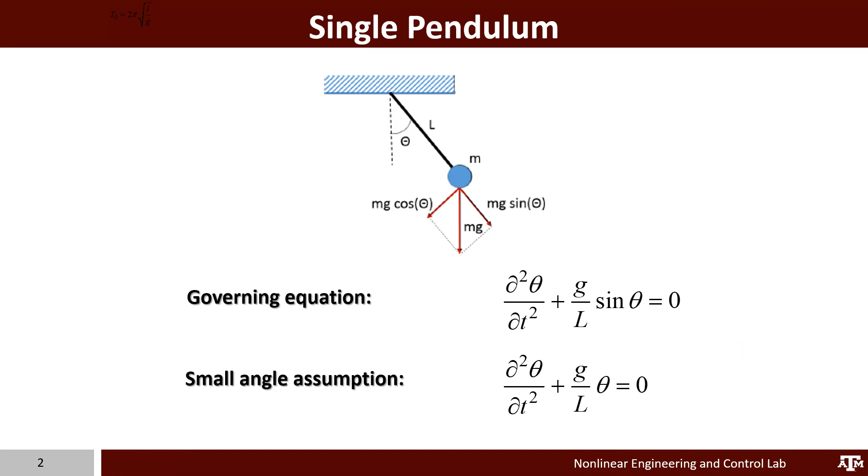Considering the nonlinear governing equation as well as the linearized equation, we plot their corresponding responses for small angle 5 degrees and 2 degrees, overlapping these two responses on top of each other. We see that initially the errors are very small. However, as the system progresses in time, the error grows rapidly with rather significant increasing phase lag.

Such a difference in phase and phase lag indicates that the linearized and nonlinear versions have fundamental differences at the frequency level.

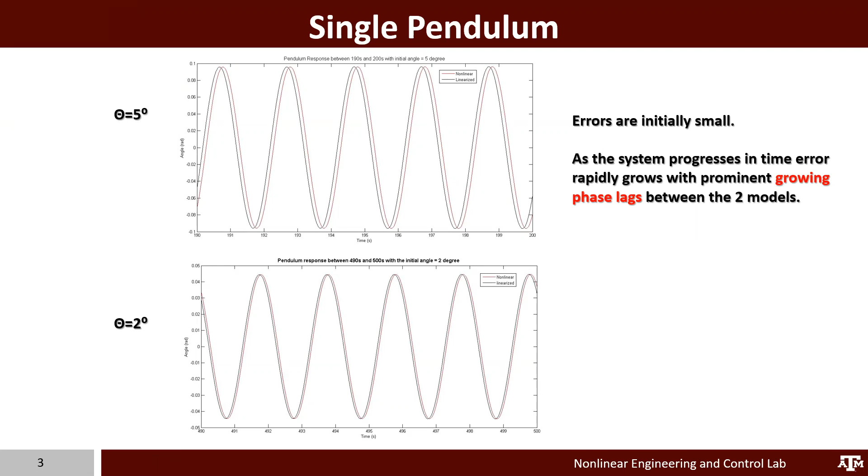Indeed, the linearized pendulum has a fundamental period which is not a function of the angle theta. However, the nonlinear pendulum is a nonlinear function of the angle, and also of the initial conditions.

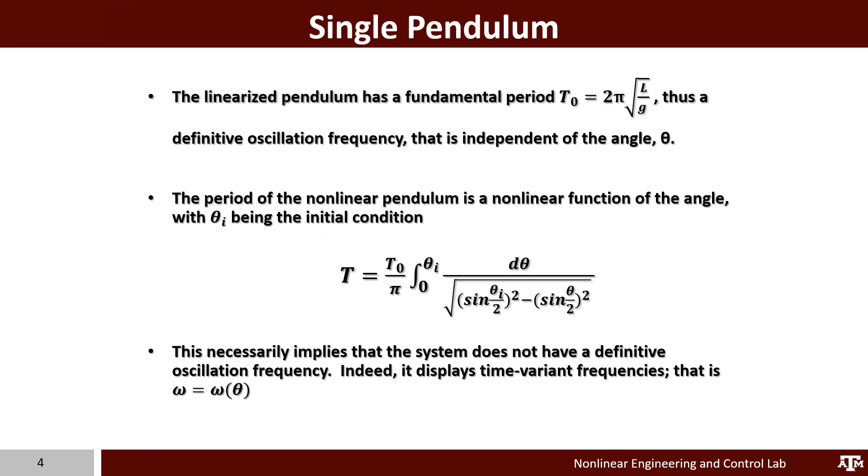This implies that the system does not have a definitive oscillation frequency. Indeed, it displays time-varying frequency. In other words, frequency is a function of the angle.

Because spectral composition, or frequency response, is considered the fundamental signature of any dynamic system, the linearized pendulum is physically and characteristically a different system from the nonlinear pendulum.

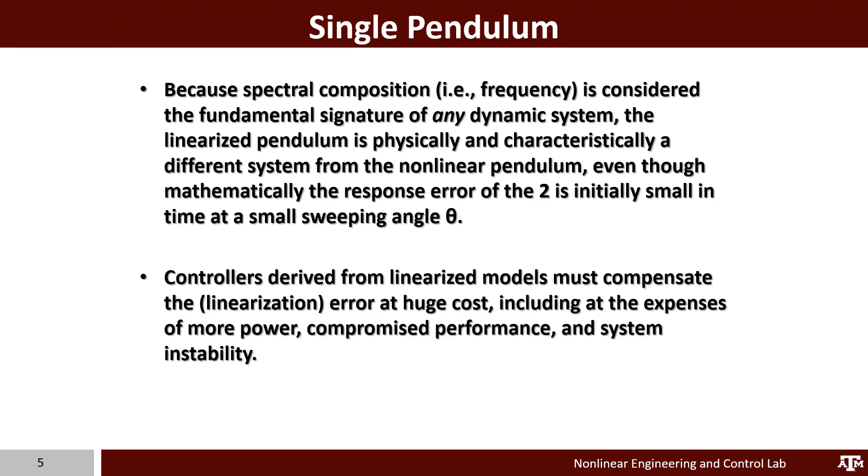Controllers derived from a linearized model must compensate for the linearization error at a huge cost, including the expense of more power, compromised performance, and system instability.

Allow me to make a few arguments. Linearization distorts and misinterprets true dynamics. The moment Taylor expansion is employed, stationary dynamics is assumed.

Orthonormal eigenvectors together span the solution domain of a linear system, in which the mapping is linear. However, nonlinear systems do not have characteristic eigenvectors because the mapping is not linear.

Stability study using eigenvalues is applicable only to linear systems. To study the state of stability in nonlinear systems, we will need to come up with something else, a different way to characterize their stability.

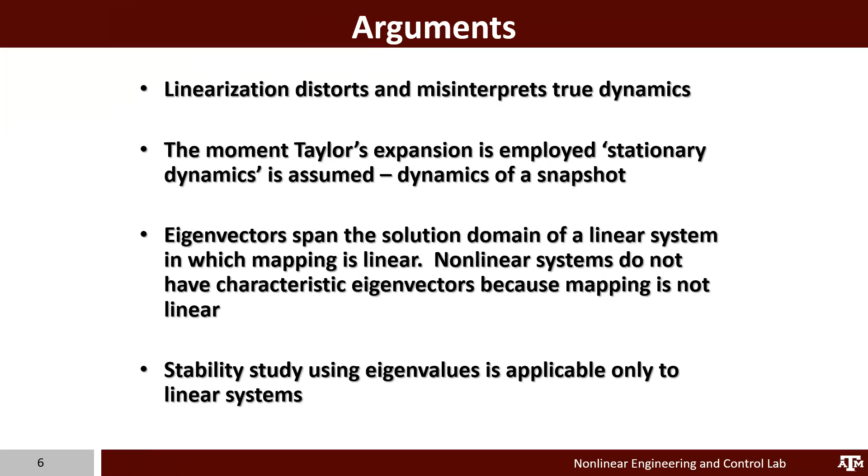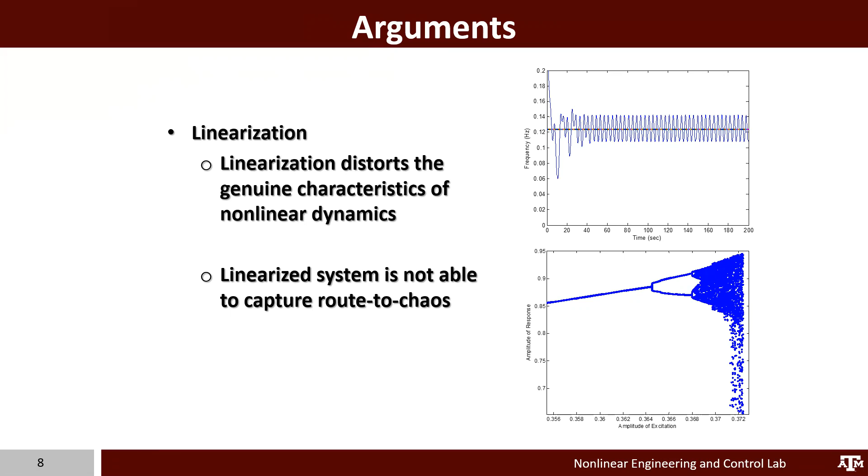Contemporary control theory shares the following issues. They employ linearization, but linearization distorts the genuine characteristics of nonlinear dynamics, and the linearized system is not able to capture the route to chaos.

Modern day control theory also ignores time-frequency coupling, but from Parseval's theorem we know that time and frequency are coupled. They're two sides of the same coin. We cannot just attend to one and deliberately ignore the other.

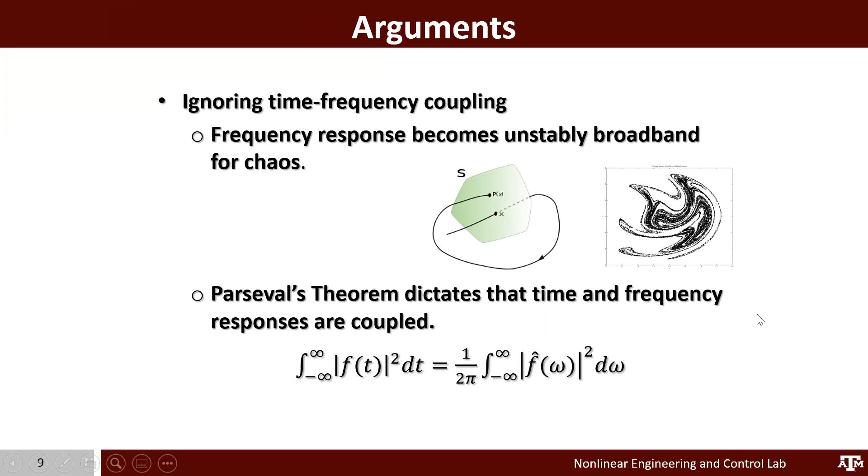We're going to see an example that comes up later. A chaotic response has an unstable, broadband frequency response.

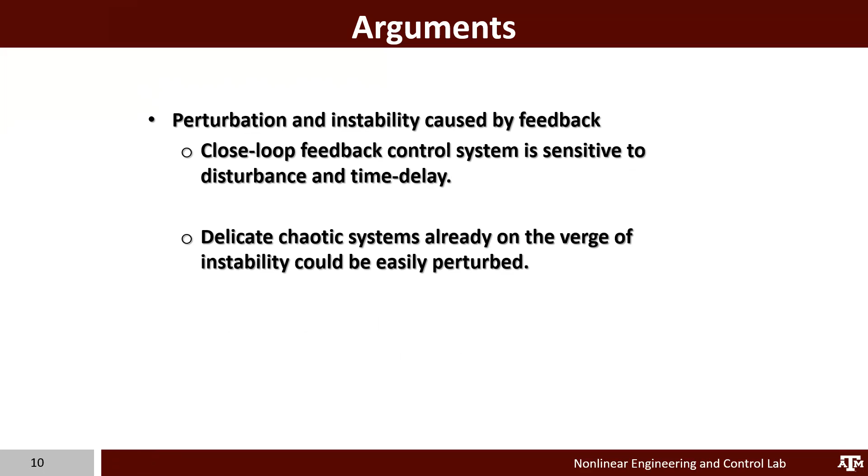Also, modern day theory features feedback, but feedback serves to disturb and perturb the system, pushing it toward further instability and even deterioration.

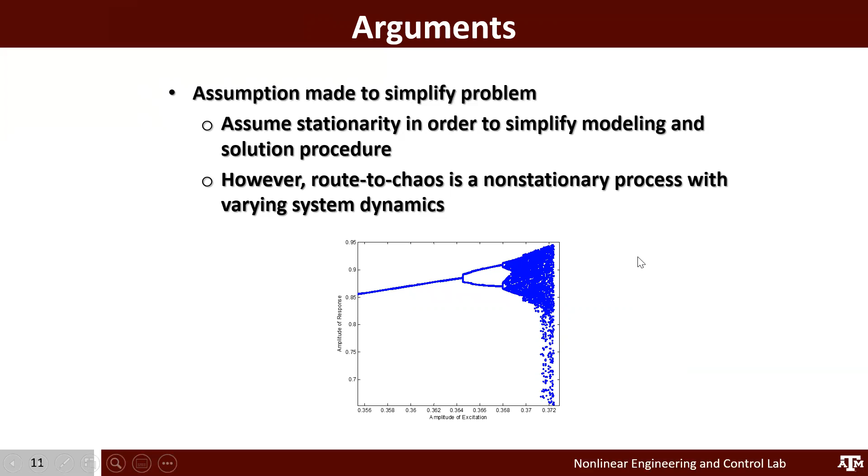In modern day theory, they also simplify a few things, including assuming stationarity. But because the route to chaos is non-stationary, making such assumptions is quite concerning.

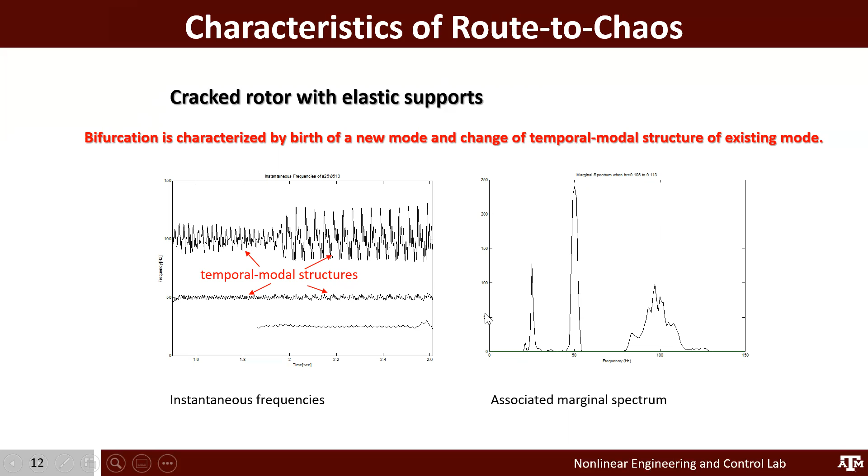So bifurcation is characterized by the birth of a new mode and a change in the temporal modal structure of the existing mode, as dynamic instability and deterioration get worse.

Then more modes are born, and ultimately this entire time-frequency response becomes broadband, as indicated by this instantaneous frequency plot right here.

So if we take a projection onto the right, you're going to see that the overall instability response, in terms of frequency, is now getting to be broadband.

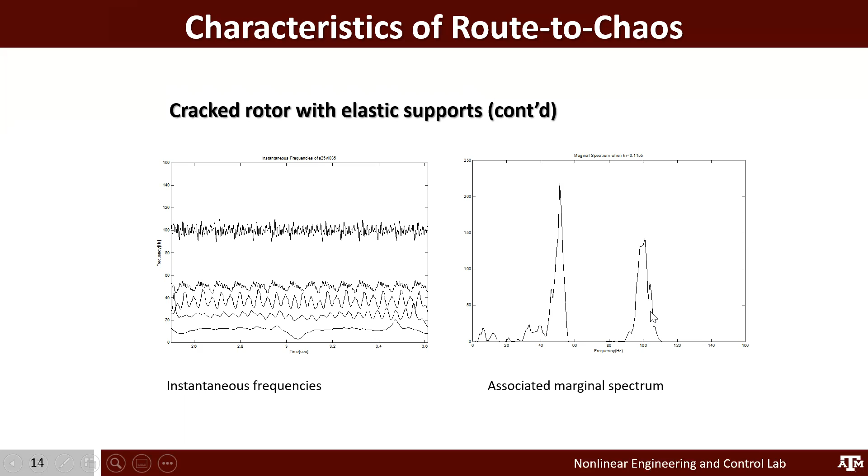And not just that—because of the oscillatory nature of these temporal modal modes, we see that the frequency spectrum is also changing in time.

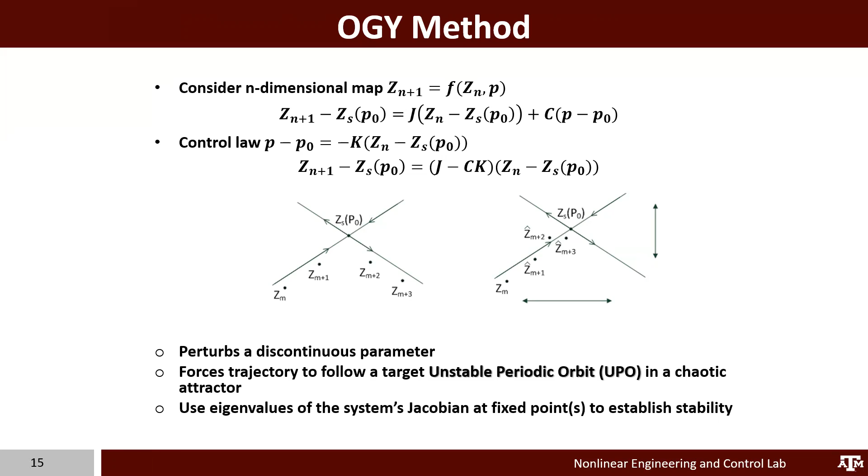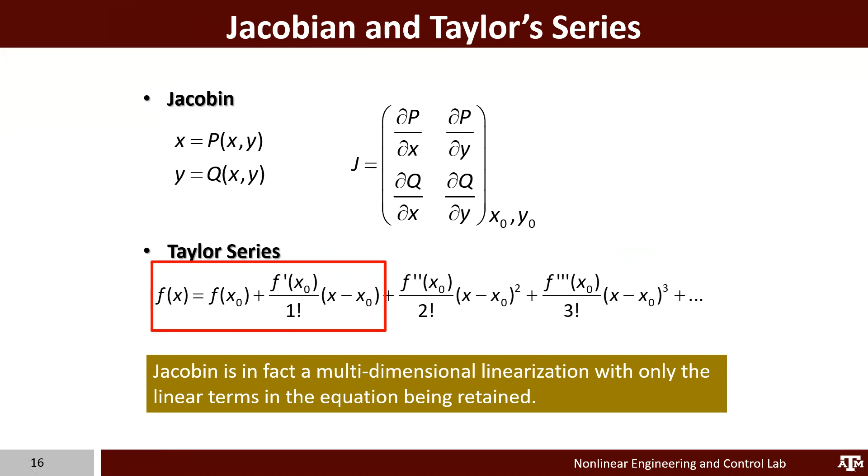Now, let me quickly review a few of the modern day nonlinear control theories. The first is OGY. A major feature of OGY is that it uses Jacobian, which is in fact a multi-dimensional linearization scheme, with only the linear terms in the equation being retained.

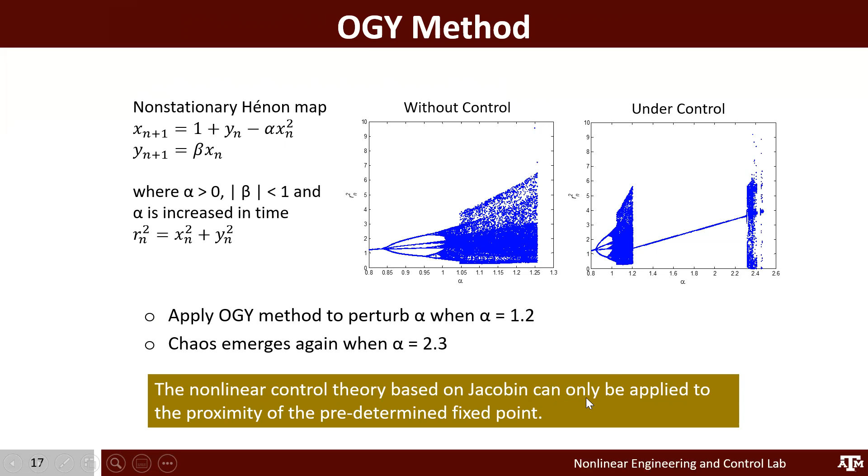Applying the OGY method to control a non-stationary Hénon map, the bifurcation plot on the left corresponds to without the OGY controller turned on, and on the right is with the OGY controller turned on. As you can see, the OGY method only worked within a rather finite range of the perturbed parameter. Once the parameter alpha reaches 2.3, the system becomes highly bifurcated, in other words, highly nonlinear. Since this OGY method is based on Jacobian, it can only be applied in proximity of a predetermined fixed point.

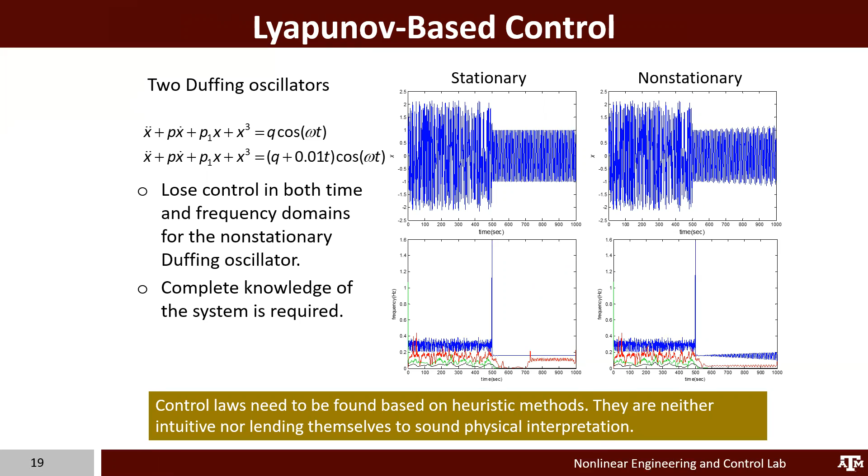The Lyapunov controller worked well for the stationary oscillator. However, it was not effective in mitigating the dynamic instability for the non-stationary oscillator. Also, because the Lyapunov control law is found based on heuristic methods, they are neither intuitive nor lending themselves to sound physical interpretation.

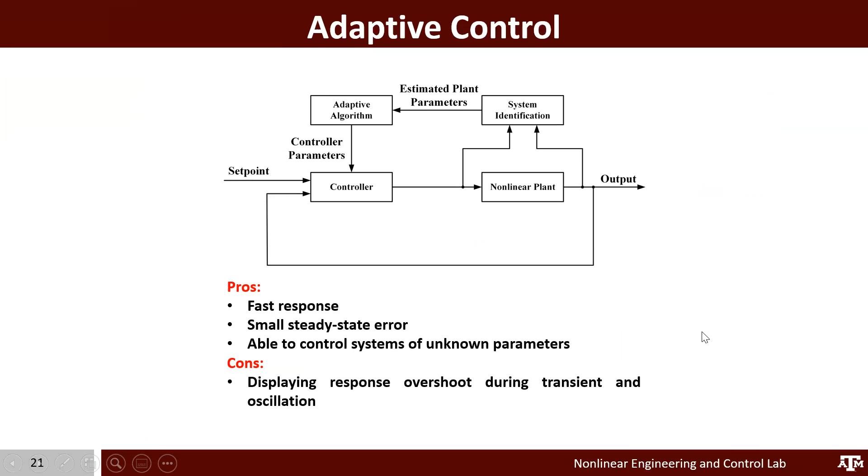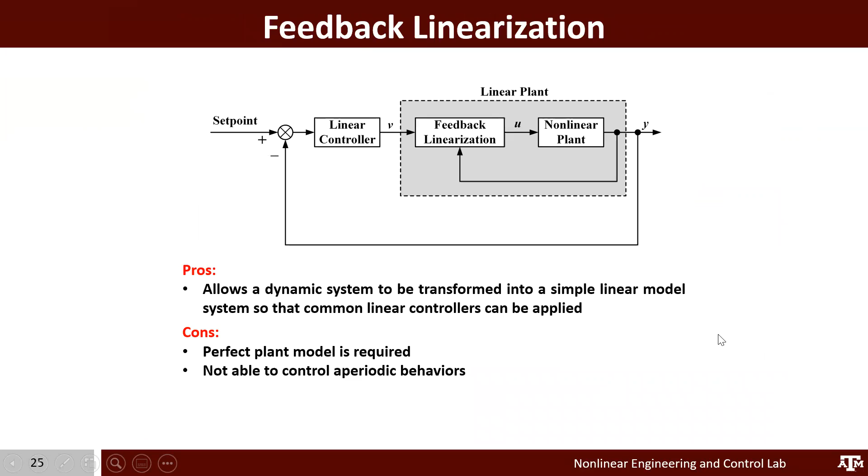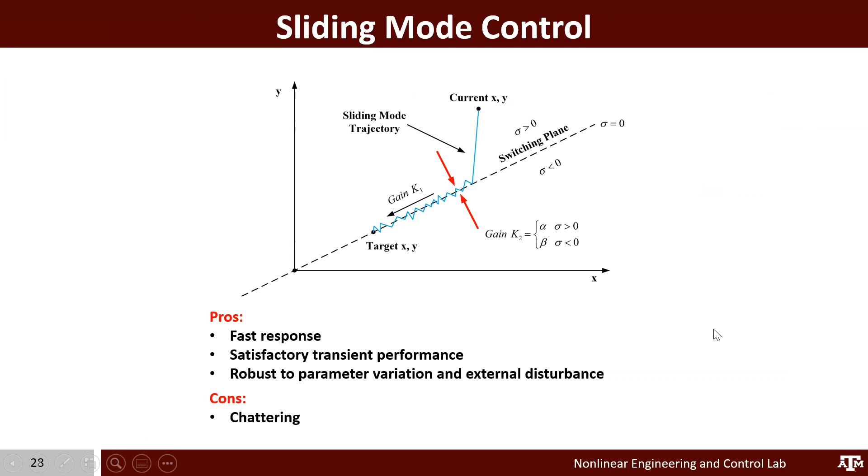There is also PID control, adaptive control, adaptive PID control, fuzzy logic control, model reference adaptive control, feedback linearization control, time delay feedback control, Takagi fuzzy control, and nowadays fairly popular sliding mode control and backstepping control. With all these contemporary control theories, they all fail to mitigate dynamic chaos.

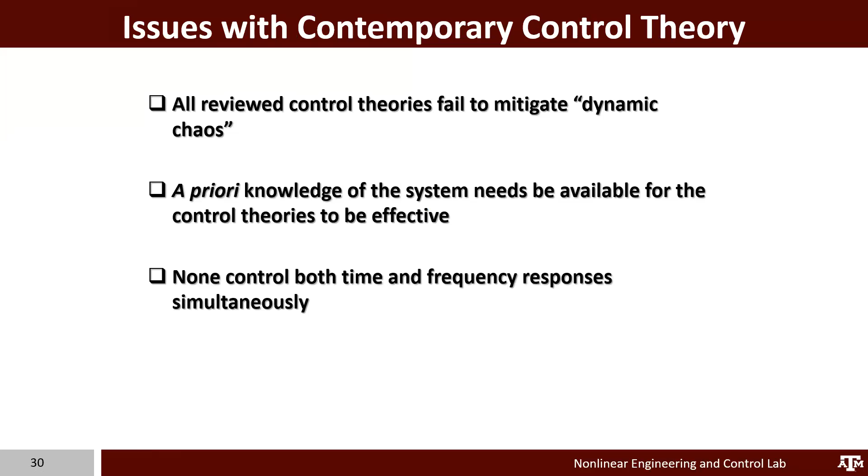A priori knowledge of the system needs to be available for the control theory to be effective, and unfortunately none of them control both time and frequency response simultaneously. So I wanted to formulate a novel nonlinear control theory that addresses and retains the fundamental characteristics inherent to all nonlinear systems undergoing route to chaos.

A theory that requires no linearization, so that the genuine underlying features of the system are preserved; one that is able to restrain time-varying frequency spectrum from becoming broadband; one that can identify the dynamic state of the system in real time; and one that can facilitate control in time and frequency domains simultaneously without distorting or misinterpreting the true dynamics.

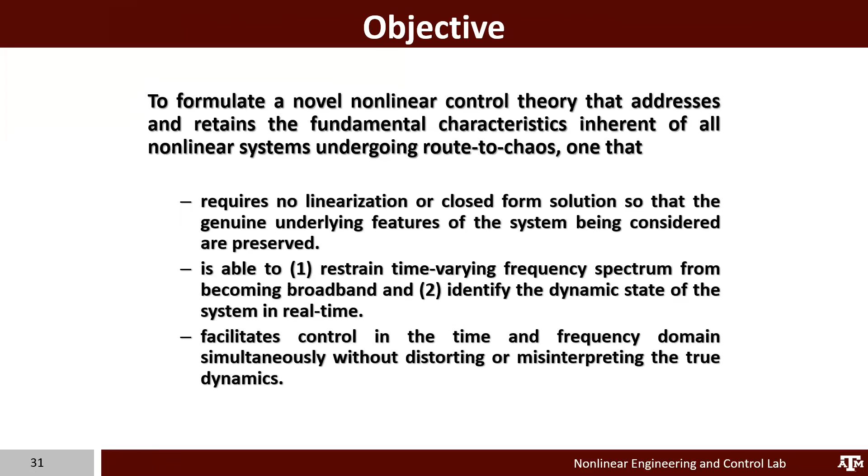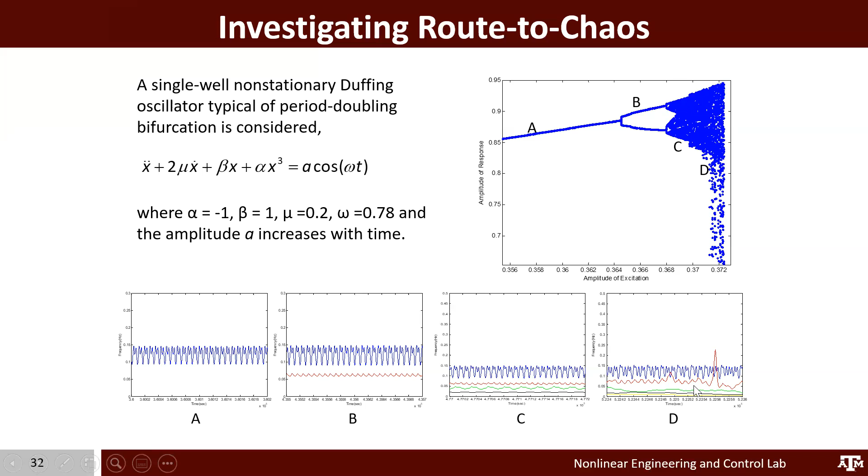As the system becomes further bifurcated, reaching into region D, the frequency response becomes broadband, because all these modes oscillate and vary in time. So what we see here is a time-changing frequency spectrum.

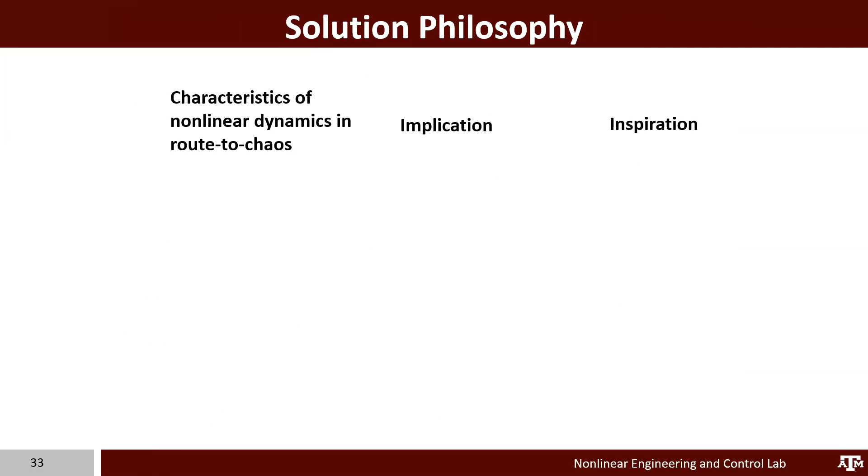With all that observation made, we understand there are some fundamental properties for nonlinear dynamics, for nonlinear systems experiencing route to chaos. The first is they're sensitive to initial condition and time delay. This implied using a feed-forward concept for control.

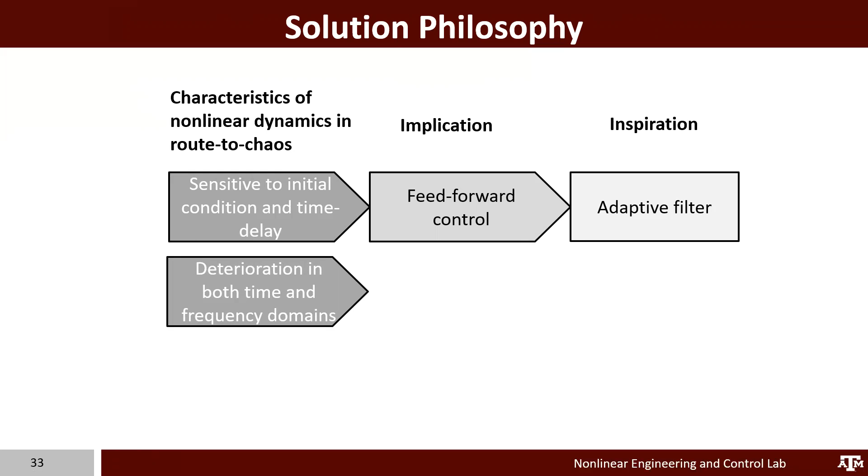And then I took inspiration from the adaptive filter concept. The second property is that when the dynamic system becomes unstable, as dynamics deteriorate, the deterioration actually occurs in both time and frequency domains. This implied the need for addressing time and frequency together, so I took inspiration from discrete wavelet transform, and from there conceived solutions addressing time and frequency.

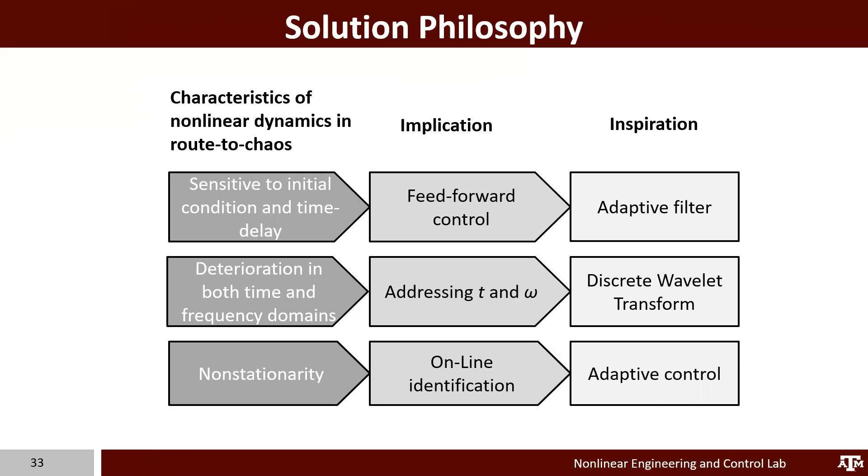The third property is non-stationarity. This implied the need for implementing some sort of online identification feature, and I took inspiration from modern-day adaptive control ideas.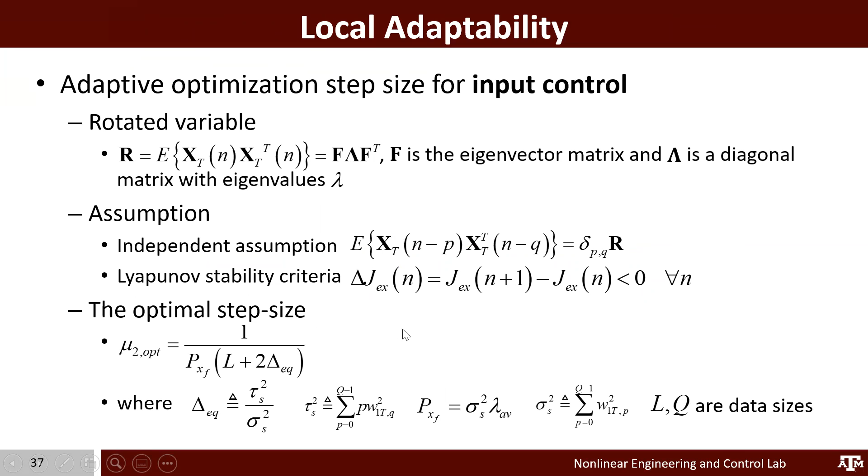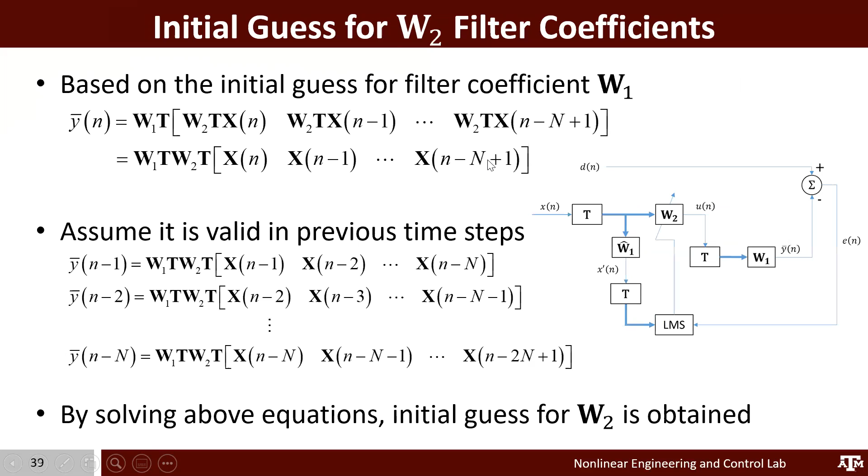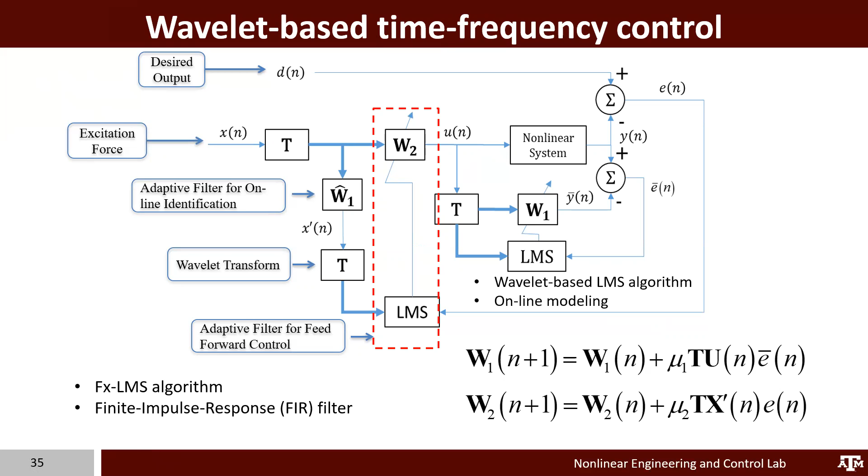We mathematically derived this criteria right here for mu2, and the entire derivation actually comes with 126 equations. Because this is for controlling a nonlinear system, it's important that we get the W1 and W2 filter coefficients right at exactly the moment the controller is turned on. It's absolutely critical and essential that we get the W2 and W1 coefficients approximately right, because if we do it properly, the control can converge rather rapidly, and then the control objective can be very quickly obtained.

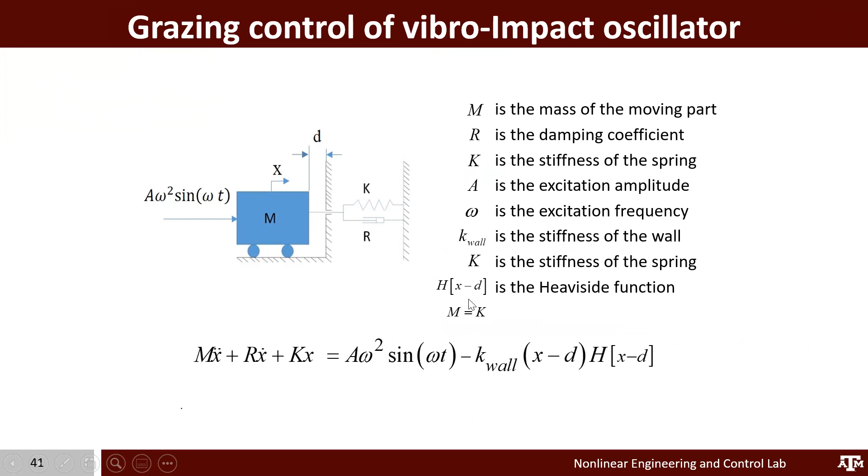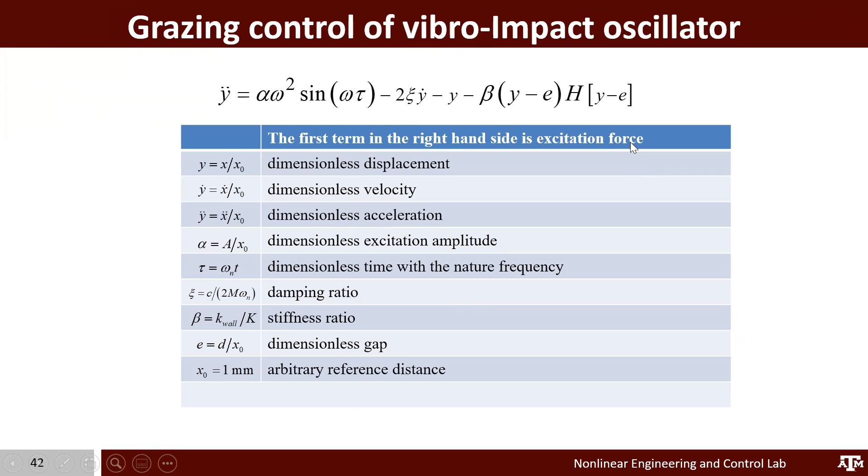Next is to apply the nonlinear control theory to the grazing control of a vibro-impact oscillator. As you know, the vibro-impact oscillator, such as this one, is highly discontinuous and very difficult to control. Using normalization to turn the state space variables into dimensionless form, we now have this governing equation for the vibro-impact oscillator looking like this.

We studied the response, the behavior of this oscillator, using these parameter values as input, and we get the system's response in terms of the phase plot—this is for the uncontrolled results. Without the controller, you can see that the corresponding instant frequency response is broadband. It also has many sophisticated oscillating modes all together.

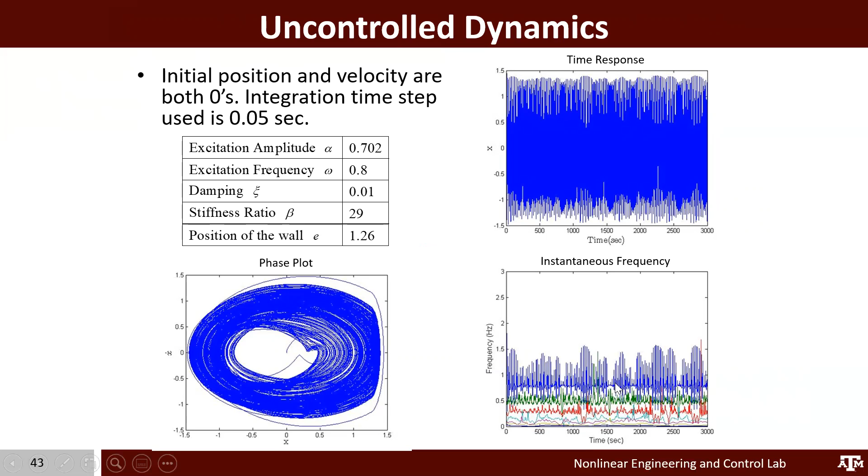With the control target specified to reach a specific frequency as well as amplitude A, this vibro-impact oscillator, put under control of the nonlinear controller, achieved very rapid convergence to a controlled state with very small error. The corresponding instant frequency plot shows that indeed the frequency response was chaotic and time-varying broadband, but once it got controlled, it becomes just one single frequency.

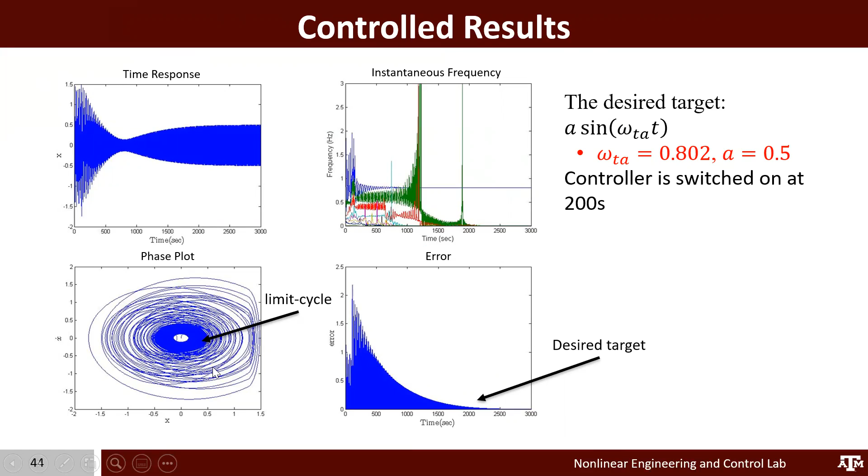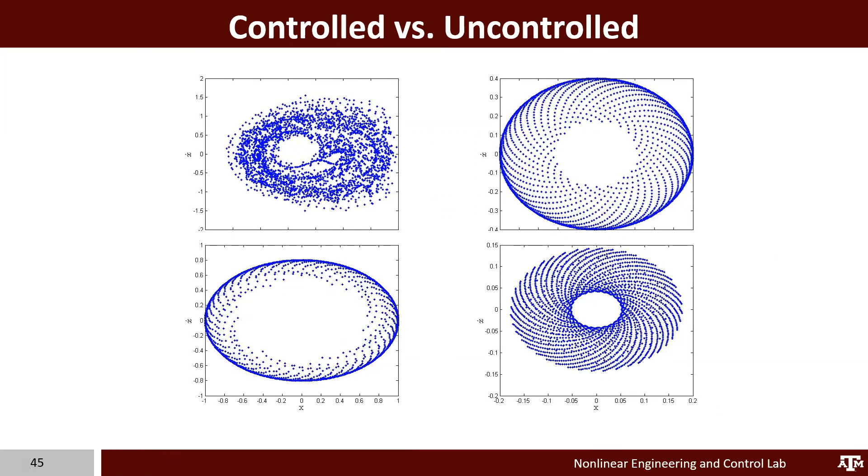The second example is to control a non-autonomous time-delayed feedback oscillator. This feedback oscillator has many physical implications and significant application in engineering. This system is nonlinear—it has a cubic term, and it also has two time delay terms, one of them up to the cubic order. So this is a very difficult oscillator to control.

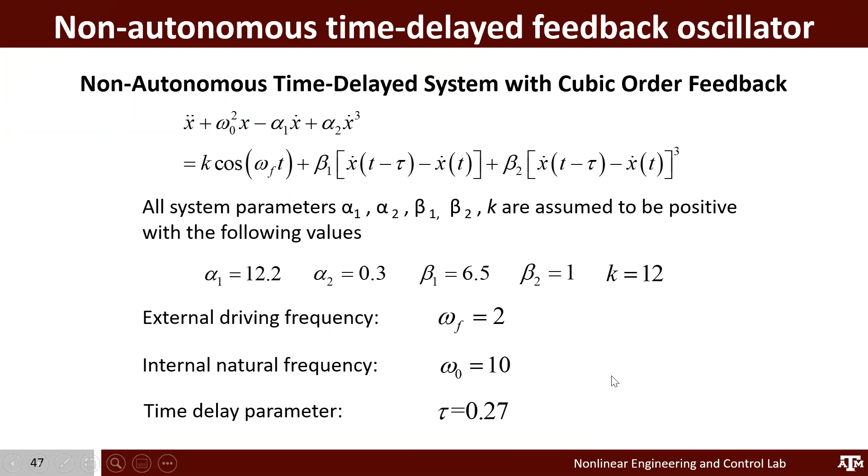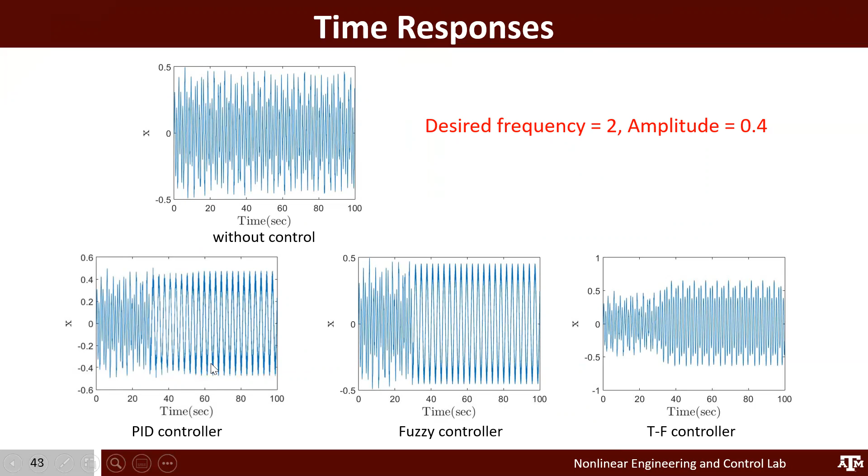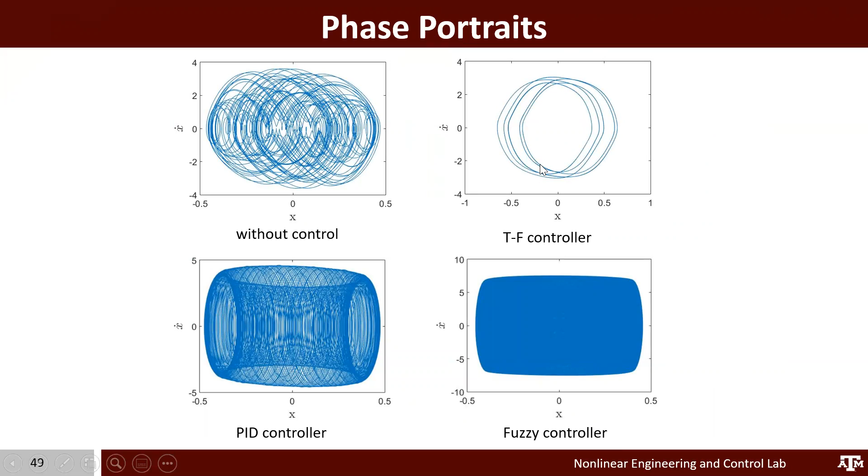Using these parameters, we study the behavior of this oscillator, and we also compare the control result with a fuzzy controller and a PID controller. This right here shows the corresponding phase portraits, and what we can see is the time frequency controller puts the system under control, and the system eventually becomes a limit cycle, but not so with PID and fuzzy.

The reason that both control results have a high frequency in them is because of the cubic order feedback and also time delay. This feedback itself serves to perturb the system, and that action brings about a high frequency response. Not just that—these two controllers are unable to maintain dynamic stability.

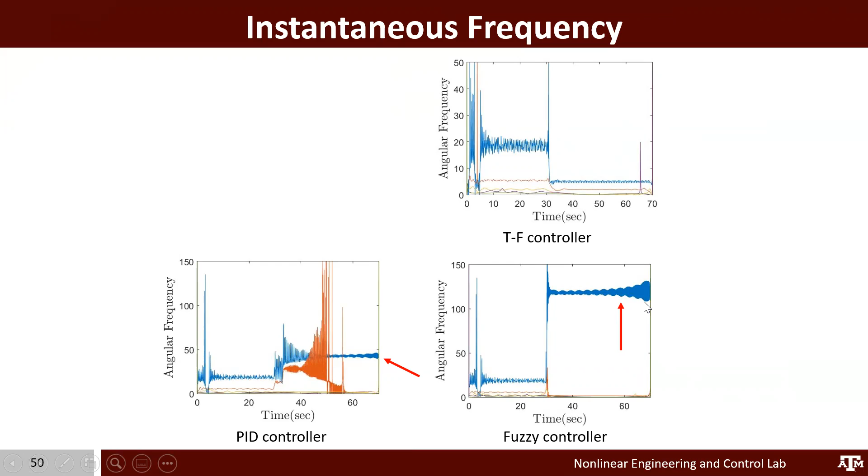As you can see, there are very significant, sophisticated temporal modal structures indicating dynamic instability. The last example is applying nonlinear time frequency control to a permanent magnet synchronous motor.

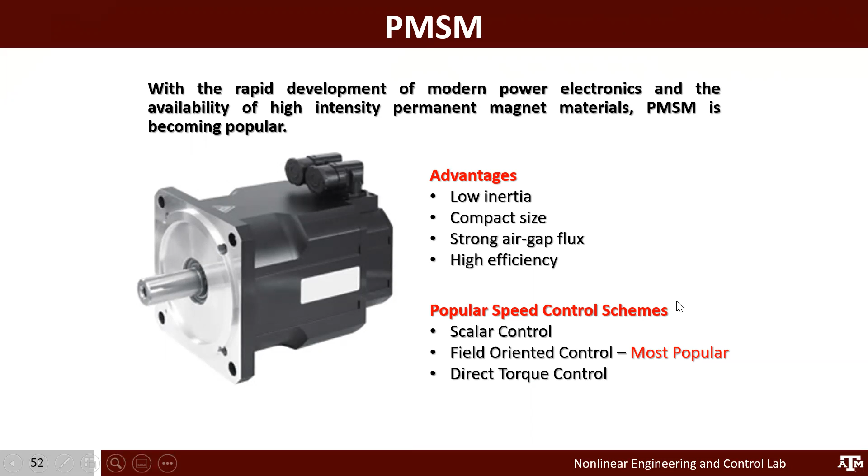PMSM is quite popular—we find it everywhere, in electric cars, hybrid cars as well. Nowadays the most popular control scheme for controlling PMSM is field-oriented control, FOC control. So we incorporated time frequency control into the FOC structure and compared it to the PI-FOC structure.

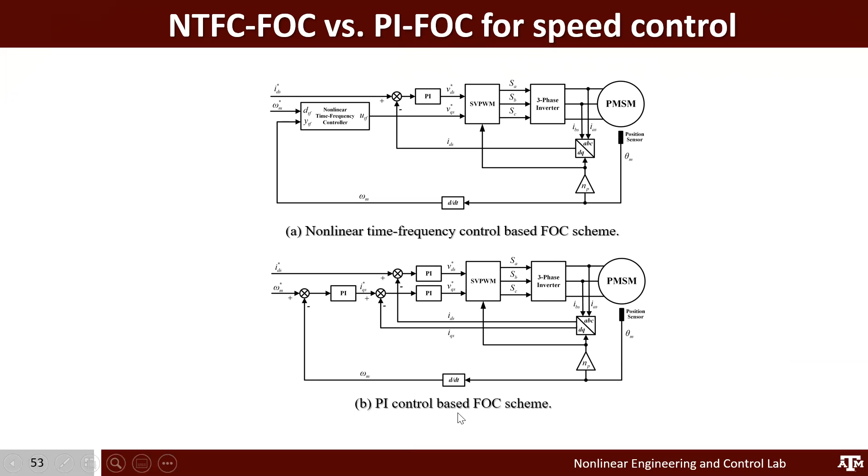We considered two scenarios. The first one is to maintain a constant load but apply varying switching speed, having the motor engage in very rapid switching of speed.

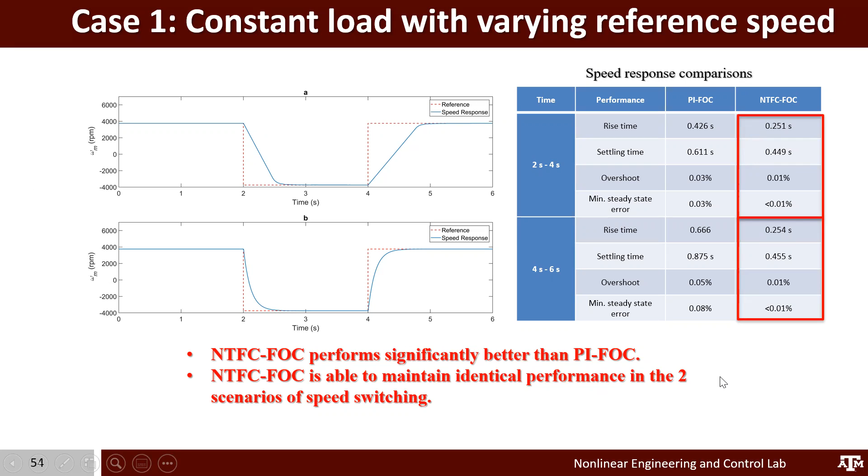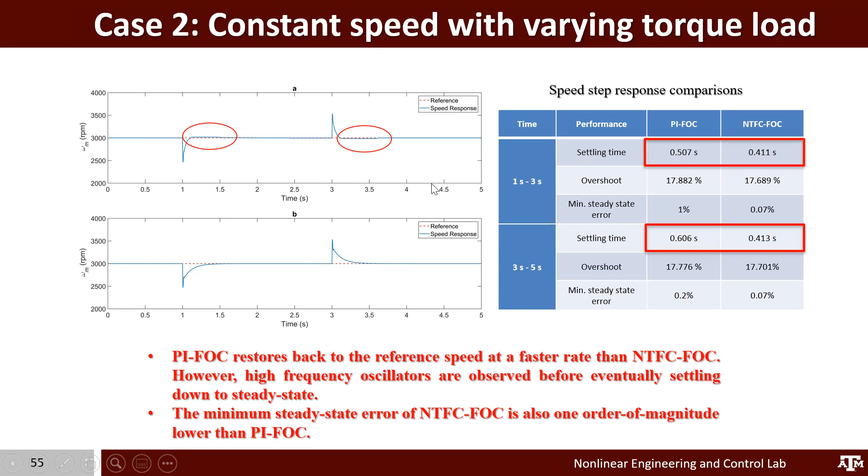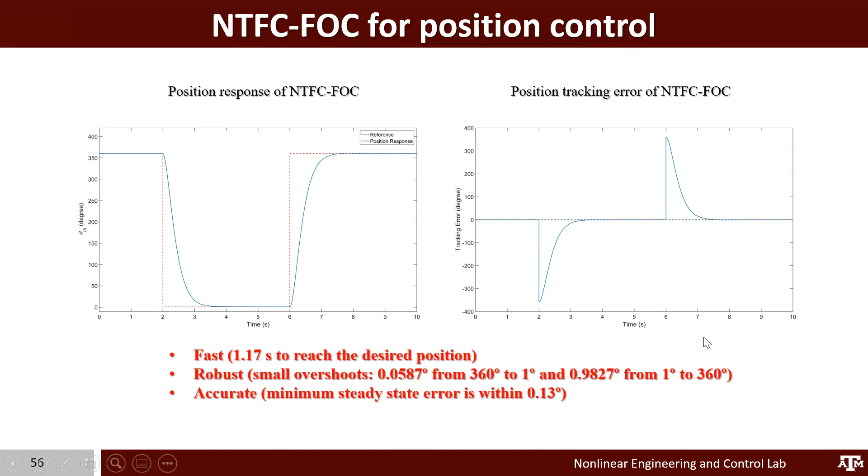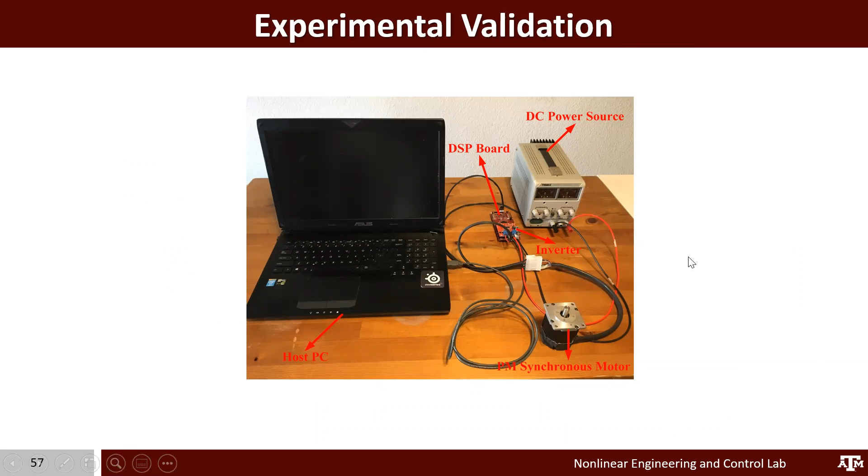Lastly, let me share with you a rather extensive, comprehensive experimental validation. We evaluate nonlinear time frequency FOC against the most common PI-FOC control, both equipped with an infinite impulse response filter and without IIR filters.

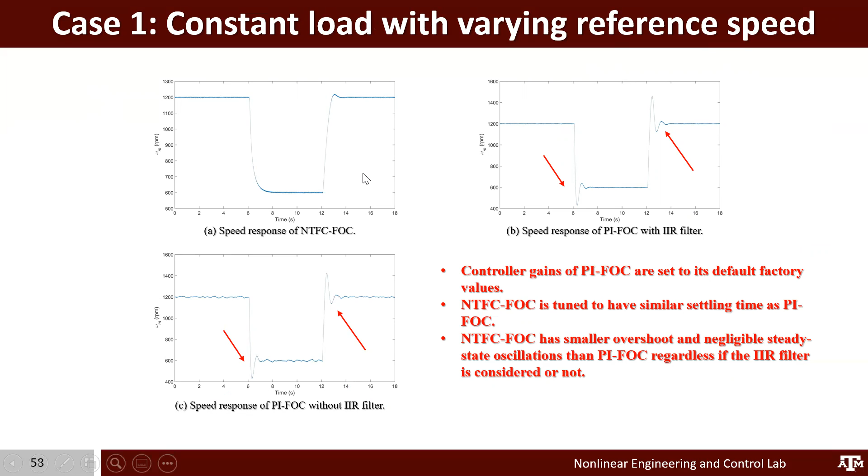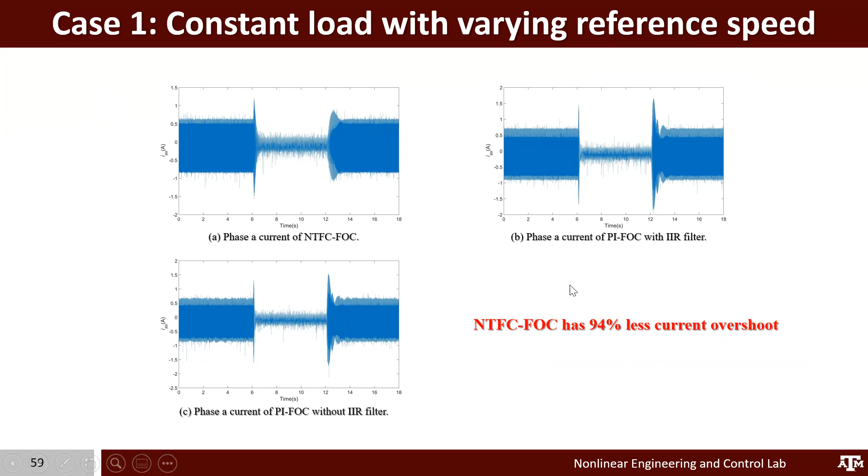However, no such rippling and overshoot is observed with nonlinear time frequency FOC. It also has 94% less current overshoot, meaning it's very stable and does not draw additional power to ensure stability and constant speed operation of the motor.